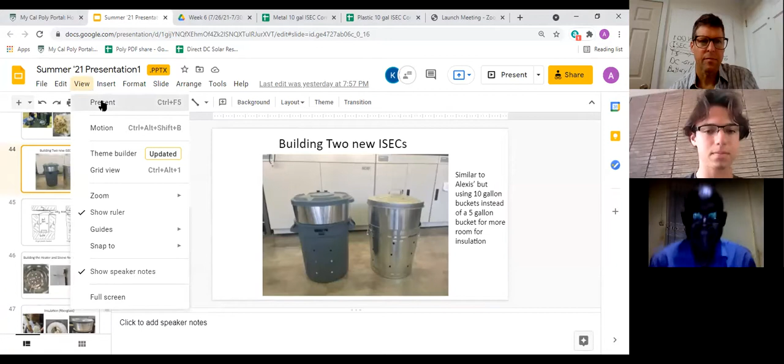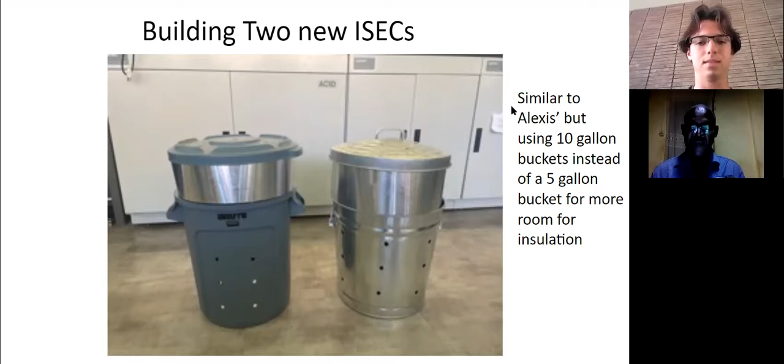So this week we've been working on these two ISECs that we started building last week. And so they are similar to the one Alexis has brought us, but they're 10-gallon buckets instead of 5 gallons to have more room for the insulation. And so they're similar in the same ways where we use the concrete heater with the beads sunk into it and the nichrome wire going through it.

And so you can see the tops are lifted off by those aluminum rings, and in there is more fiberglass insulation covered in the welder's blanket. And we'll see more of that in the diagram here. So see the lids are filled with fiberglass and covered in the welding blanket. And then we use slightly different designs for the plastic one and the metal one. In the plastic one, we had perlite at the bottom because it's a...

Alec? Yep. I can see your mouse, so you can use your mouse to identify where you are. Yeah, like right now it's in the perlite.

Okay. So perlite on the bottom left here gives our steel sleeve on top of it somewhere to sit that's hard so it doesn't rock around or slide down. And then on top of that is the heater that I was talking about. And then in the sides, we insulated with fiberglass and then covered that in the welder's blanket up until this steel sleeve here that our cook pot slides into.

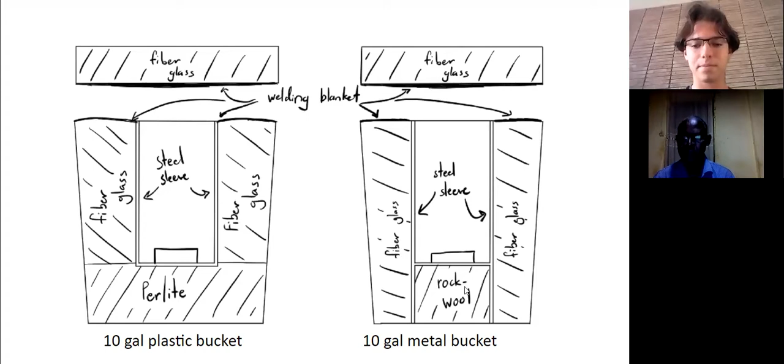And so then the difference between that one and our metal bucket is that for the metal bucket, the steel sleeve goes all the way down to the bottom and makes contact with the very bottom of our bucket. And then we have this aluminum sort of landing near the bottom of it that the heater rests on. I think it's steel. This sleeve is steel. The part that the heater rests on is aluminum. Oh, okay. You could make it out of steel, though, it'd be fine. Yeah, it's just harder to get a steel landing to fit in there.

And so then below that we insulated with rock wool, but fiberglass would have worked just as well, or at least similar. And then the sides were insulated with fiberglass as well. And then again, covered with the welder's blanket at the top. And so on the left, you can see the heater I was talking about with the ceramic beads sunk into concrete. It's a little hard to see in the picture, but there's nichrome wire going through all of it that heats up when you connect it to the power.

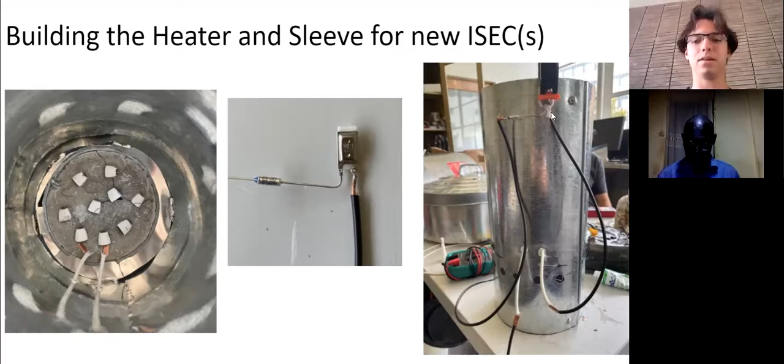And then in the middle, there's our thermal switch and thermal fuse so that nothing gets too hot. And you can see we glued it up near the top of our steel sleeve that is in the middle of our ISECs. And that orange clamp there is holding it down while the glue sets.

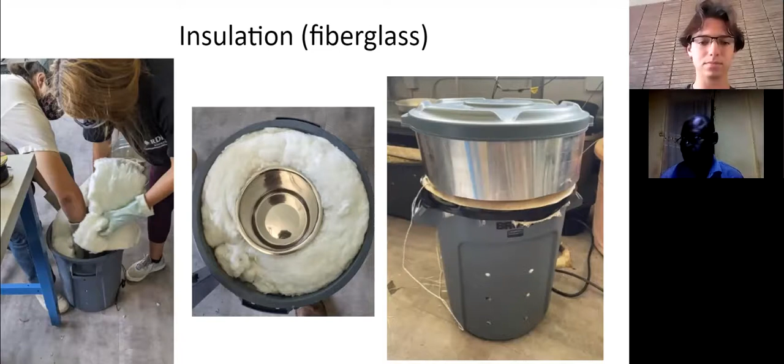And so here's us insulating the plastic ISEC. You can see this big piece of fiberglass just fits around the steel sleeve. And then on the bottom, there was perlite for this one. And you can see in the middle picture, the cook pot slides into the steel sleeve. And then on the right, we covered that fiberglass with the welding blanket. And then on the bottom of the lid here, down in the middle where it meets, there's also welding blanket covering it.

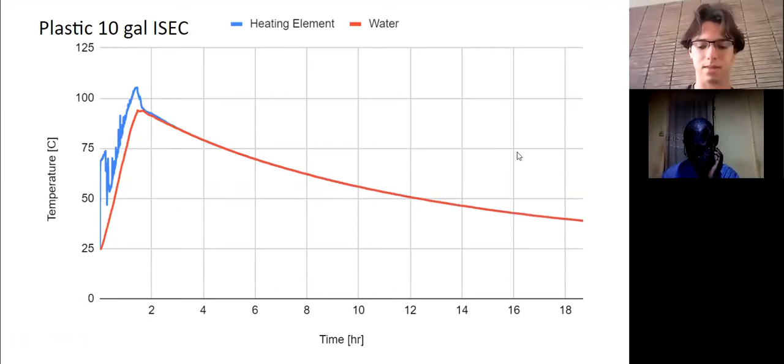And so then this is the data from when we tested the ISECs inside. This is for the plastic one that I was showing. We heated the water up to about 91 degrees and then let it cool overnight. The red line is the water and the blue line is the heater. And then we did the same thing for the metal bucket, and that's how we got this data. That gold line is the water in the metal bucket, which we heated up to what should have been 100 degrees and then let it cool overnight as well.

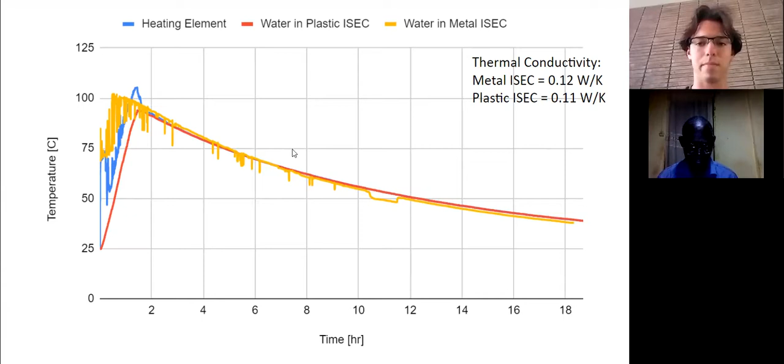And then we found the thermal conductivity for each of those. For the metal one, it was about 0.12 watts per Kelvin, and the plastic one was just a little bit better at 0.11 watts per Kelvin. And so for the plastic one, that means that if there's a 100-degree temperature difference between the ambient and inside of our ISEC, then we'll lose about 11 watts. And so you can see the curves are really similar, but the metal ISEC is just a little bit steeper.

How was that, Emmanuel? That was great. Okay. I want to reiterate two important things. That insulation worked really well. And I think going to a 10-gallon bucket helped quite a bit because you enlarge the insulation, especially if you can make it wider. And this is something for Salma to consider if he's making his own shapes, what size he wants.

The other thing is we need support underneath the cooker, the ISEC. And so we put perlite down to make it hard. But in the other one, we ran the sleeve all the way down to the ground. And we thought that would conduct a lot of heat, but it really didn't because both of those curves were very similar. So I'm going to stop the recording.